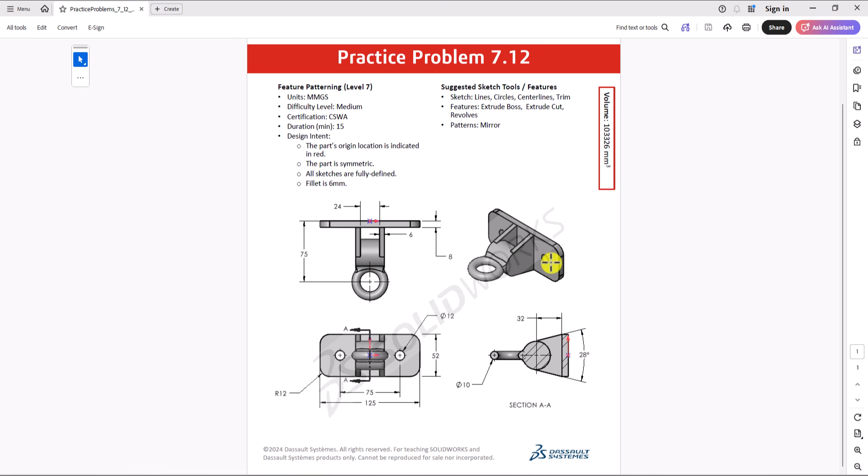Looking at this geometry, first of all we have a symmetric geometry. You can see we have the 3D model, top view, front view, and section AA. My preference is to focus on the base of the geometry first. You can see we have this rectangular shape, so I'm going to make that part first. Then I'll focus on the second feature, making the cutout in it, and as a last step I'll work on making this ring shape.

So with this introduction, let's jump into SolidWorks and start modeling this part.

In SolidWorks, first we need to check the unit of measurement, and you can see that we have millimeter gram second, which is the correct unit of measurement. Now click on a sketch and choose the front plane. Here, first I need a rectangle, so let's click on the rectangle command, and I'm going to select center rectangle. Let's make a rectangle.

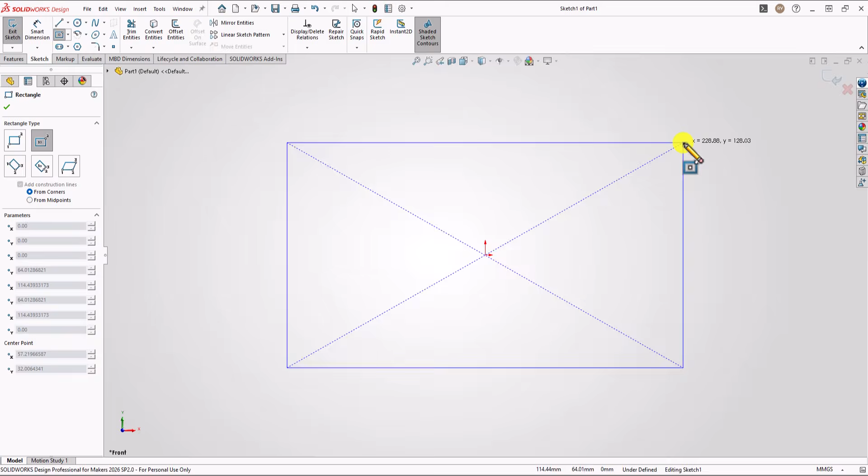According to the front view, the width of this rectangle should be 125 millimeters, and the height should be 52 millimeters.

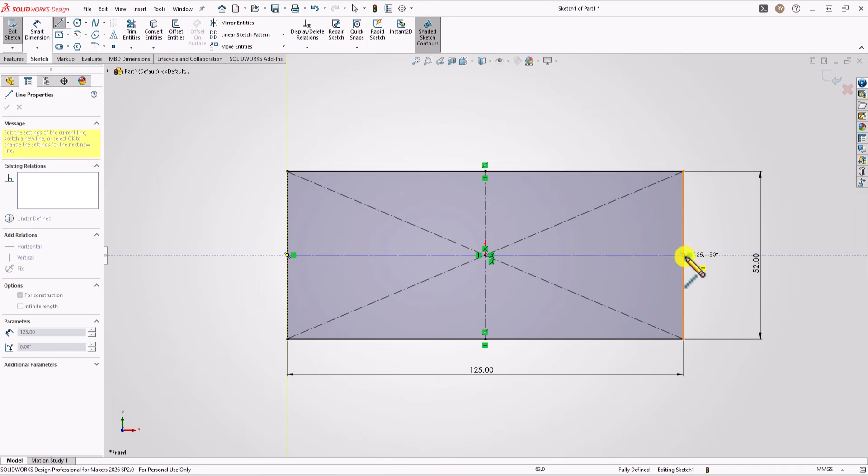Also, we need two circles. So let's make a center line, and let's make another center line here as well. And I'm going to make a circle here.

The diameter of this circle should be 12 millimeters, and the distance between this circle and the mirrored circle on the other side should be 75 millimeters.

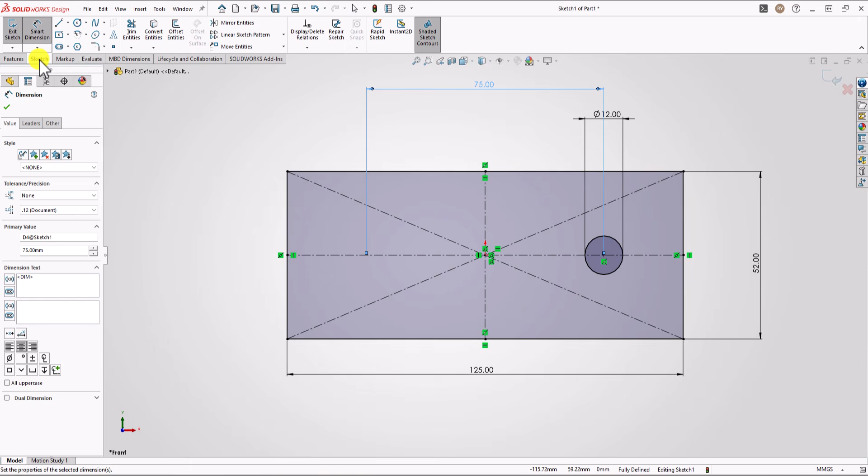Now we have one circle. In order to make the second one, from the sketch I can click on Mirror Entities. I can select this circle, and for the mirror line I can select this vertical line. You can see the preview of the mirror object. Click OK, and that's it. Now I have these two circles.

Okay, so now we have the base of the geometry. In order to make a fillet in the corner, you have two options: either make the fillet in sketch mode or do it in 3D mode. Here I prefer to do it in 3D mode.

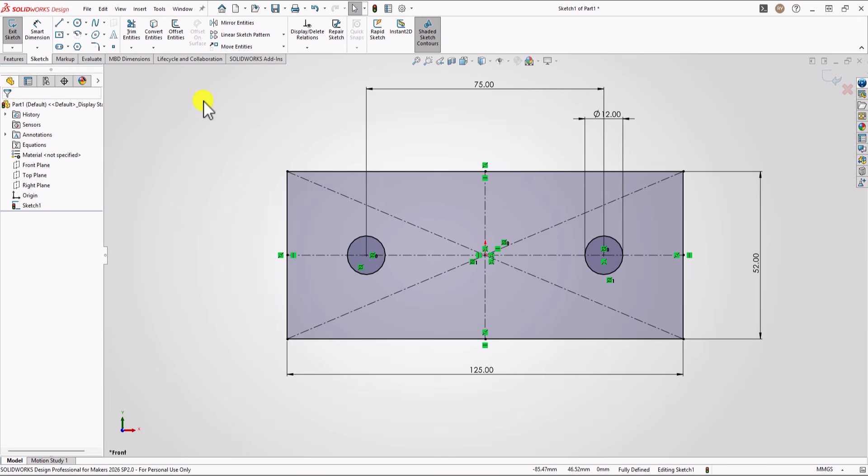So what I can do here is click on Feature and extrude this object. For the thickness, we need 8 millimeters, so change 10 to 8. Click OK, and that's it. So that's the base of the geometry.

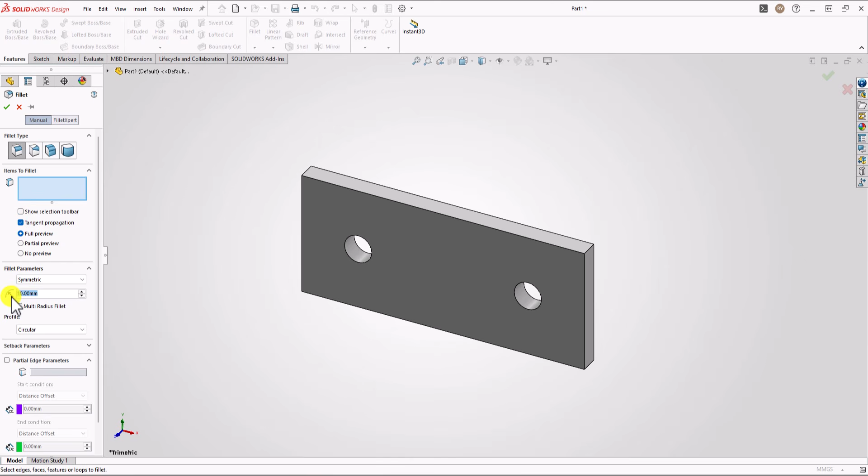Now I need to add a fillet. From Feature, click on the Fillet command, change the radius to 12, and click on this corner, this one, and this one. Click OK, and that's it. Now you can see we have the base of the geometry.

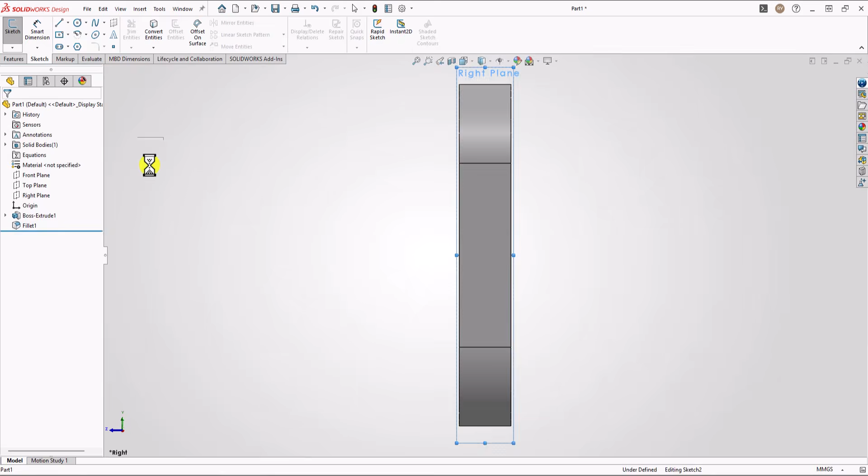Next, I'm going to focus on the second feature. In order to make it, I click on Sketch, and from the drop-down menu I choose Right Plane. Now here, because it's a symmetric object, I click on Center Line and make a center line here. Let's make sure this is horizontal.

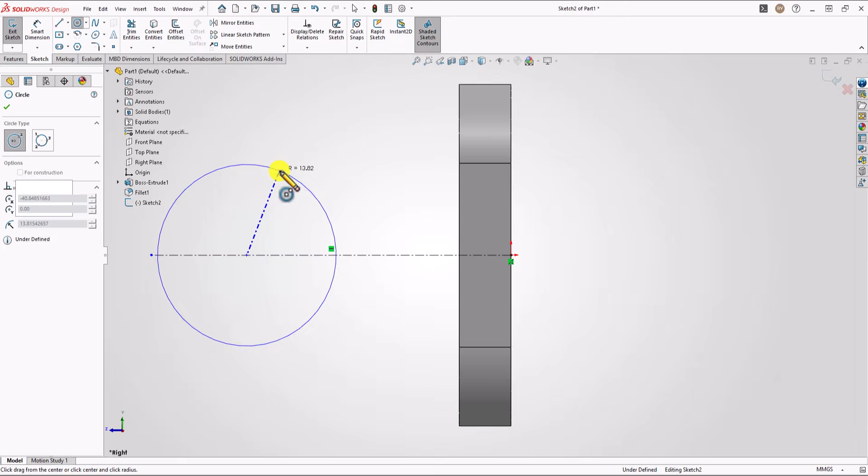Now let's make a sketch for the feature. Click on the Circle command, and we need a circle here. From the drawing we don't know the diameter of the circle, but let's make the other features, and most probably by other dimensions in this geometry, we can find the diameter of the circle.

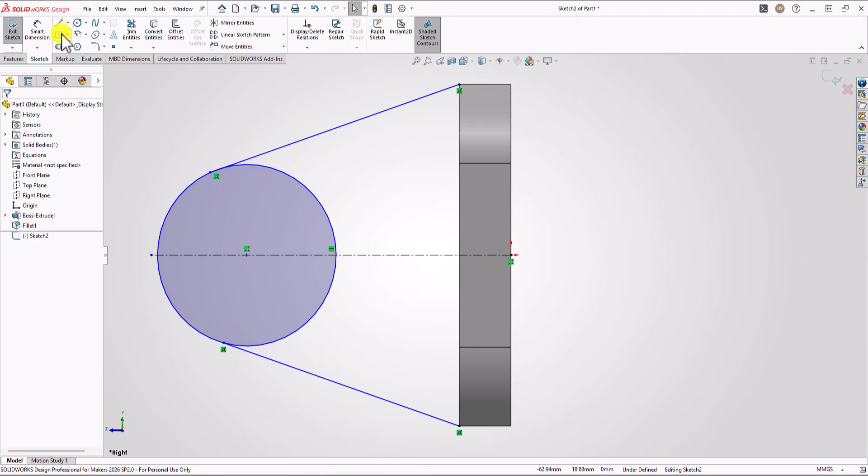So click on the Line command, and let's make a line from here tangent to the circle, and another line from here tangent to the circle. According to section AA, the angle between this line and this line should be 28 degrees. Also, the distance between the center point of the circle and this line should be 32 millimeters.

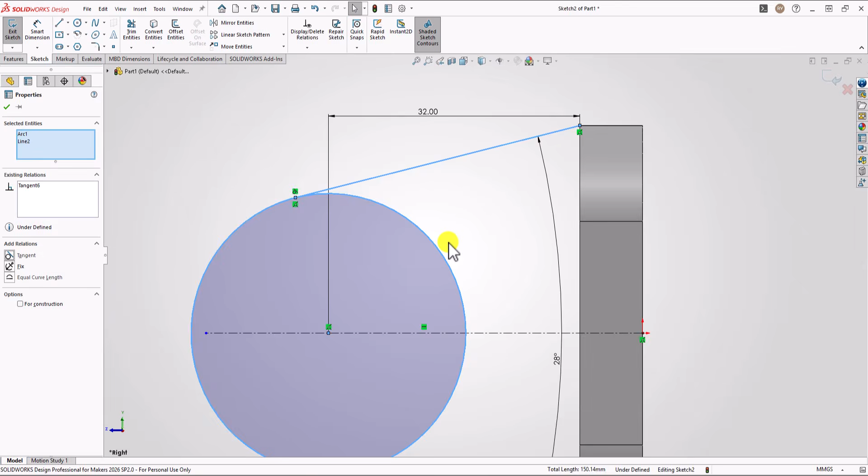Looking at the geometry, it seems like I tried to add a tangent line, but I'm not seeing a tangency relation here. So what I can do is click on this line, hold Control, click on the circle, and choose tangent. I repeat this process here: select the line, hold Control, select the circle, and choose tangent. Now you can see our geometry is fully defined.

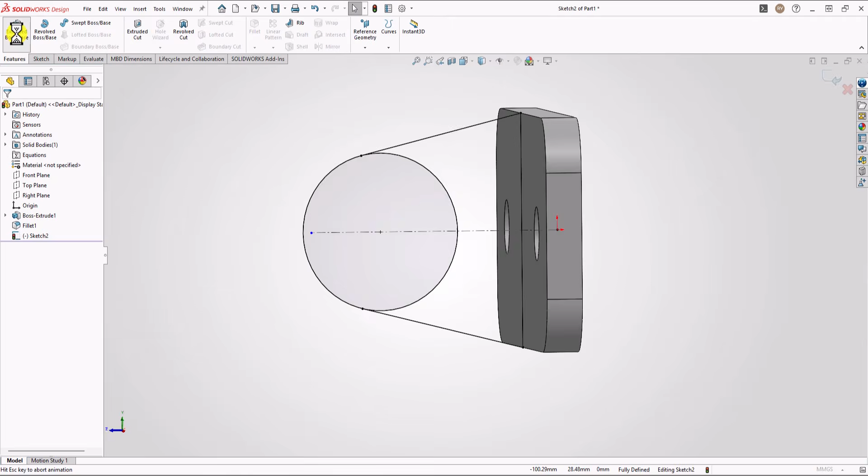Let's close this sketch. Click on the Line command and start from here and end it here. So now we have this fully defined sketch. Click on Feature, click on Extrude Boss, and click on these three contours.

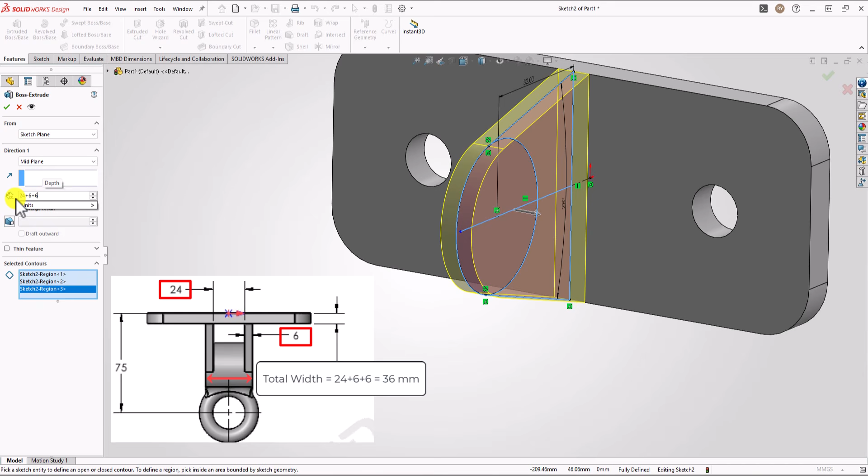Change the setting here from the drop-down menu to midplane because it's a symmetric object. For the overall width of this feature, I want to go with 24 millimeter, which is the gap between two sides of the object, plus 6 millimeter thickness on one side and 6 millimeter thickness on the other side. Click on OK, and that's it. So that's what I need for this object.

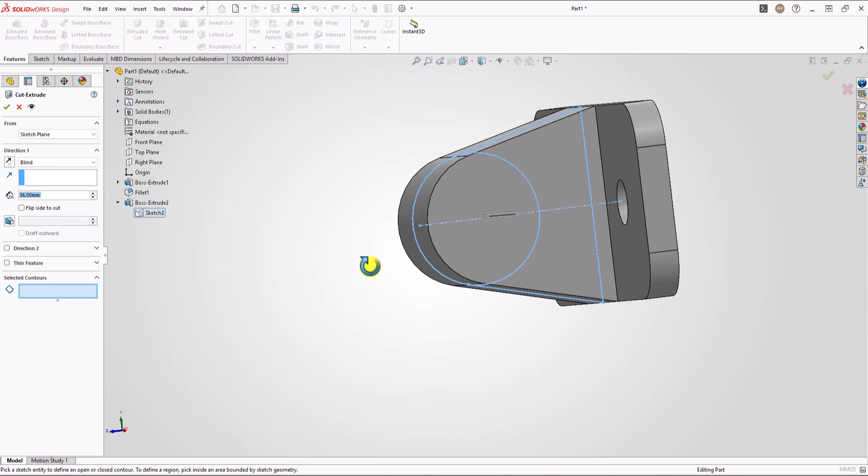Of course, this is not complete. I need to make a cutout in it. And in order to make a cutout, I'm going to take advantage of the previous object. Click on Extrude Cut, click on the drop-down menu, click on Boss Extrude number 2, and activate Sketch 2, the previous sketch. Okay, so now this sketch is activated.

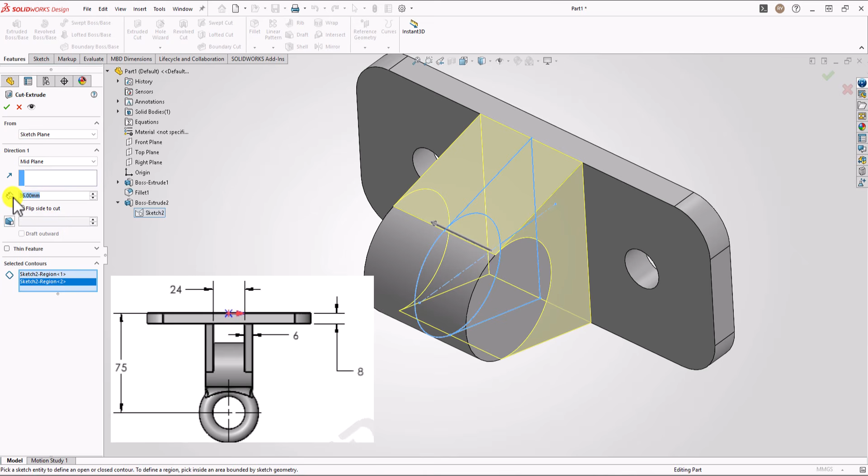In order to make a cutout, I only need this part of the contour. I don't need this circle. So what I can do is select this part, and now you can see that both parts are selected. Change this one to midplane because we need a cutout which is symmetric. For the width of the cutout, go with 24 millimeter, and now you can see that I'm making the cutout in the center of this feature. Click on OK, and that's it.

So now I have the geometry. Next step, I want to make a ring here. In order to make that ring, I want to use the Revolved Boss command. In order to use Revolved Boss command, we need a sketch and we need an axis of rotation. So let's click on a sketch, and choose right plane.

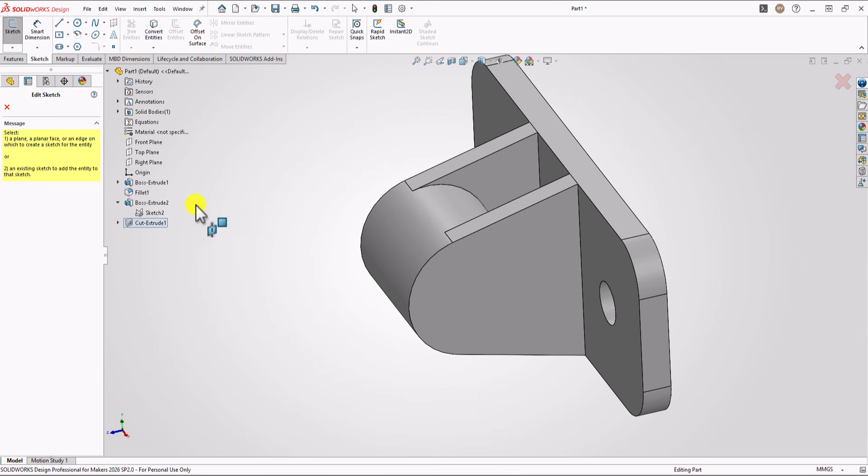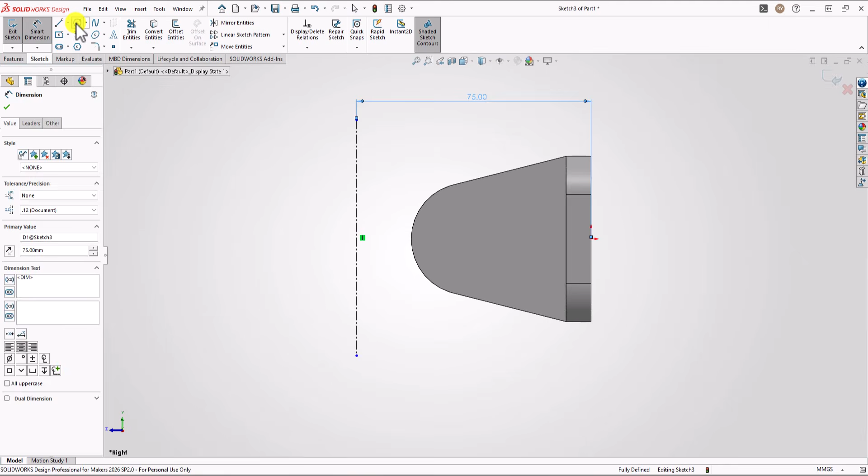Now here, first I'm going to make the axis of rotation. So this is the axis of rotation. Looking at the top view, you can see that the distance between this axis and the center point of the geometry should be 75 millimeter. We also need a circle. Click on Circle command, and here let's make a circle. According to section A, the diameter of the circle should be 10 millimeter.

Also, I want this circle to be in line with the origin of the geometry, so I'm going to select horizontal relation. However, as you can see, this geometry is not fully defined because I really don't know where to put this circle. Unfortunately, in this question, it's not really clear where we should put this circle. Let's quickly check the question. If you look at the question, you can see that on the 3D model we have no information. On the top view, I don't see information about the cross section of this ring. Front view, I can't see that information.

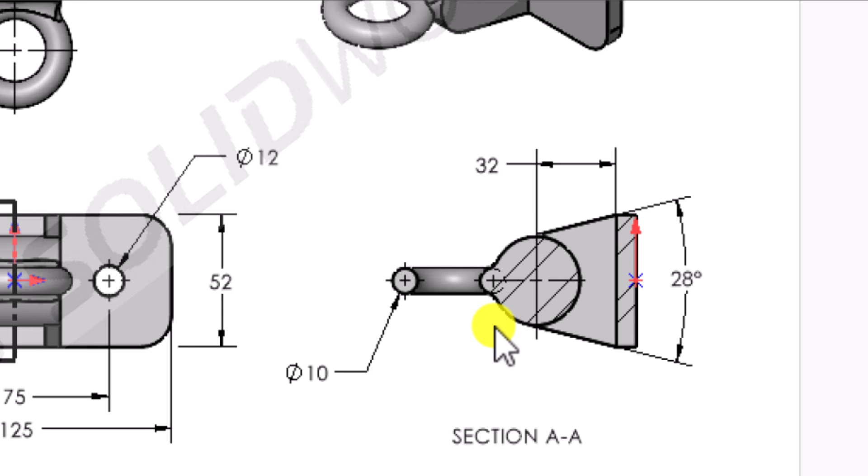On the right view, it's not clear where exactly this circle should be. The only assumption I can make here is that the center point of this circle should be right on the edge of the larger circle. So let's make this assumption, and continue solving this question. At the end, we can check if our assumption is correct or not. Let's go back to SolidWorks. So here, as I mentioned, I want to assume that the center point of this circle is right on this curve. Let's quickly choose coincident. And now you can see that the circle is fully defined.

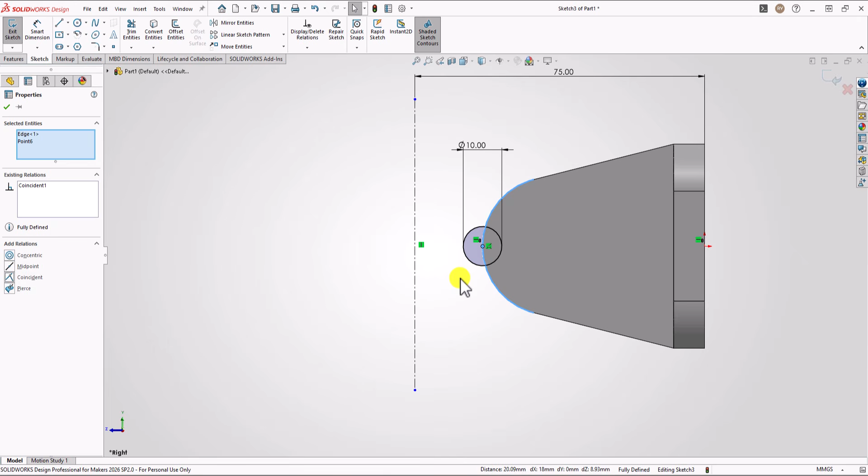Now that I have this fully defined circle, I can use the Revolved Boss command. Click on Feature, click on Revolved Boss, and here SolidWorks automatically selected the contour and axis of rotation. Click on OK, and that's it. So now I have this ring shape made.

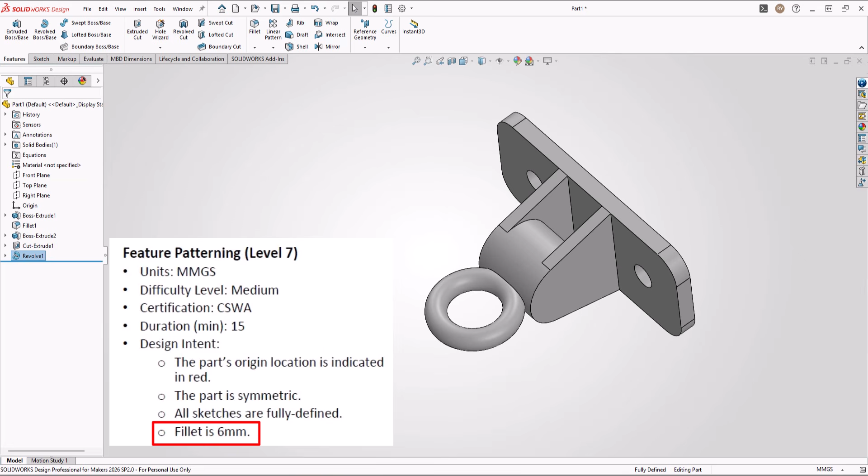Last step is to make a fillet. According to the design intent section in this question, we need a 6 millimeter fillet. So what I can do is click on Feature and then Fillet command, and for the fillet radius I'm going to choose 6 millimeter. Here I'm going to select this edge, and SolidWorks is automatically making the fillet I need. Click on OK, and that's it.

Awesome, that's it, that's the final geometry. Remember, we made an important assumption: we assumed that the center point of the cross section of this ring is right on the edge of this circle. Now it's time to check the volume and make sure that this model is correct.

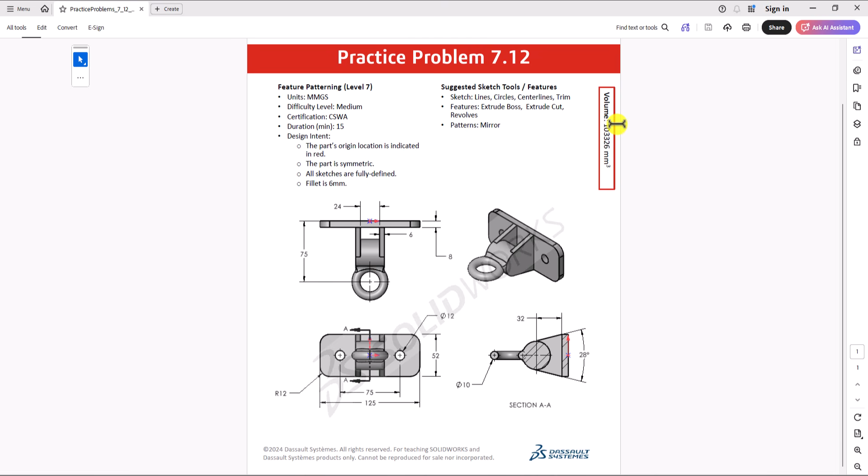Let's go back to the question and check the final answer. In the question, you can see the total volume here. The total volume that we have is 103,326 cubic millimeters. Let's go back to SolidWorks and check the final volume for our model.

In SolidWorks, in order to check the volume, you can click on Evaluate and then Mass Properties. And here you can see the total volume. The total volume that we have here is 103,326 cubic millimeters. If you round up this number, you're going to get exactly the same answer as shown in the question, which shows our model is correct and there's no problem with it.